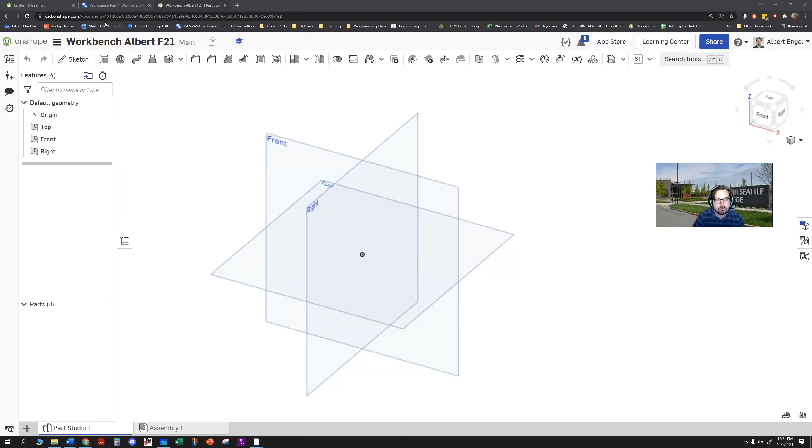All right, so let's do a little work on our workbench. So our workbench model is to build a workbench out of some 1-inch tubing and some thin plate. And we have some default dimensions on different sizes. I'm going to start with a very basic workbench design that we can then model.

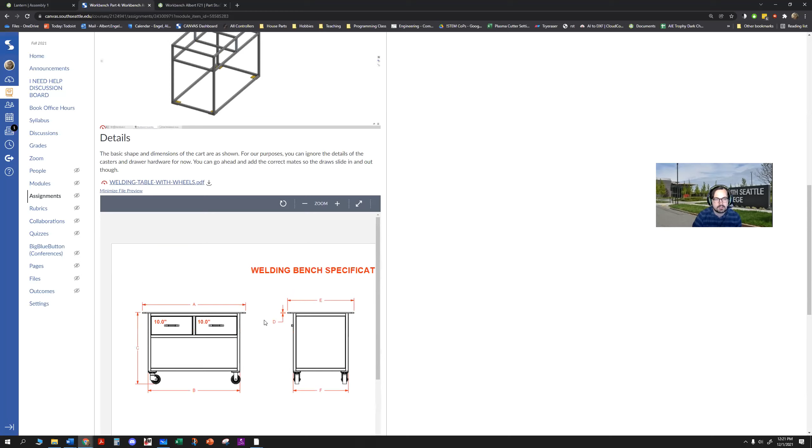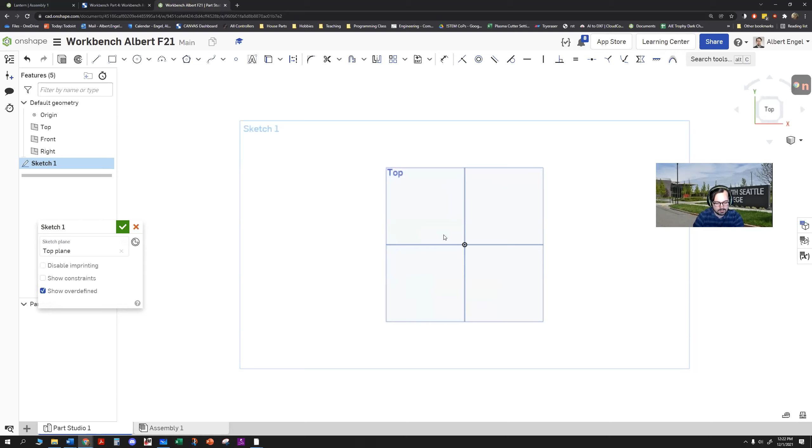Whenever I create something like this, just like our lanterns, I want to start with a proto sketch of the general dimensions of my workbench. So let's start with that. I'm going to create a sketch here in the top plane. And I can use N for normal and P for plane to turn off the planes. Now I've got a nice place to work from. I'm going to create a rectangle here.

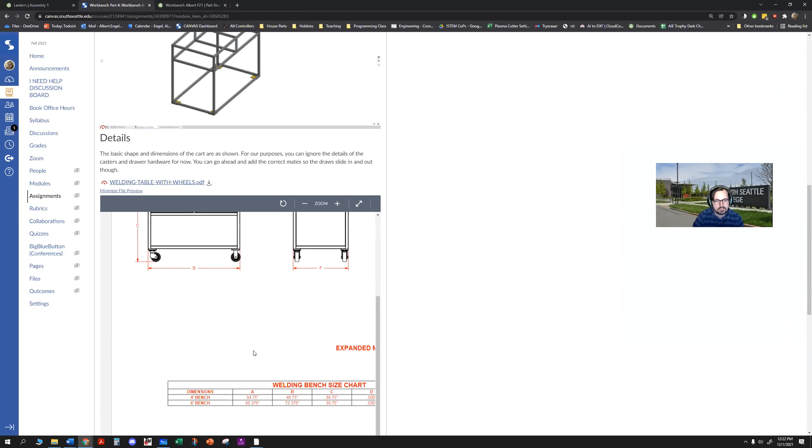Before I do that though, let me check my units. I want to go in and check my workspace units. Yeah, I want to work in inches for this, because if you notice here, all of my dimensions for my drawings here are in inches and feet, so that makes it a little easier if I start with that. And I'm going to start with my rectangle now. I'm going to go back and create that sketch one more time in that top plane. I can turn off P for plane.

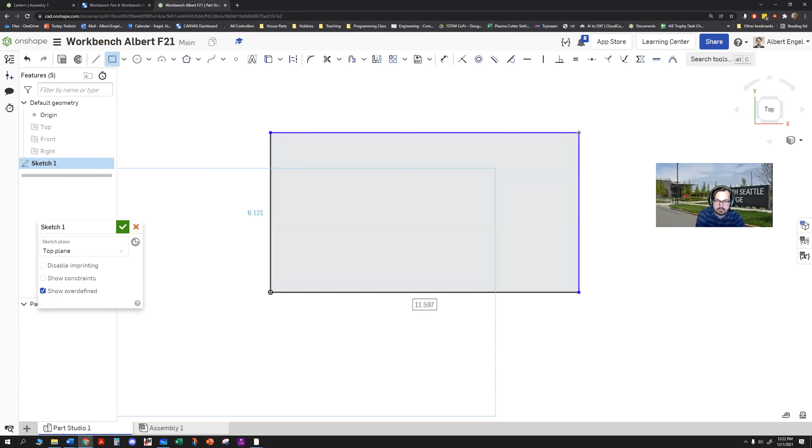I'm going to grab a corner rectangle. I'm going to drag it out. And then the nice thing about this is if I've got this, I'm going to put in some dimensions. I'm going to type in 48 and let's do 30. That tends to be a good workbench width. We can always go back and change these dimensions to match later. I'm going to hit escape to get out of the dimension tool. I'm going to drag these a little bit out of the way of the rectangle tool. And then I'm happy with that sketch.

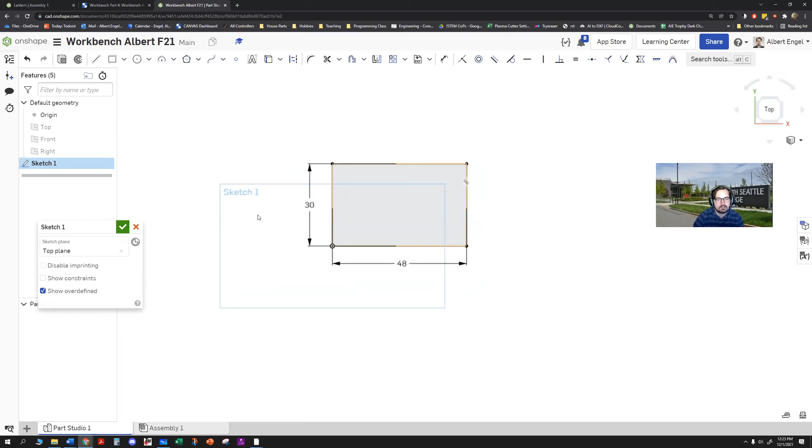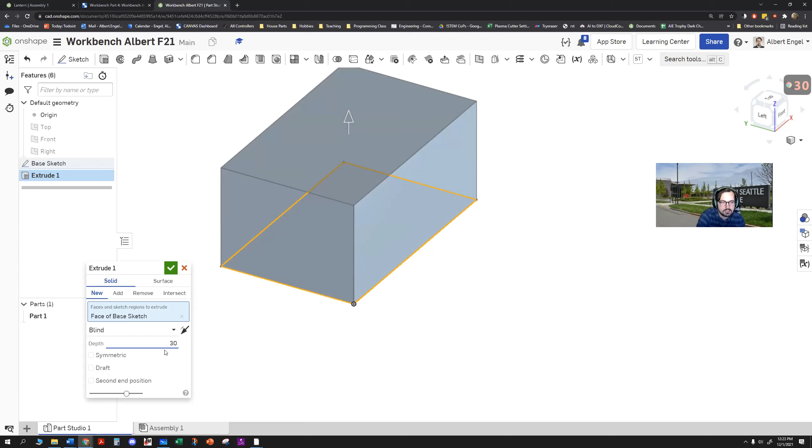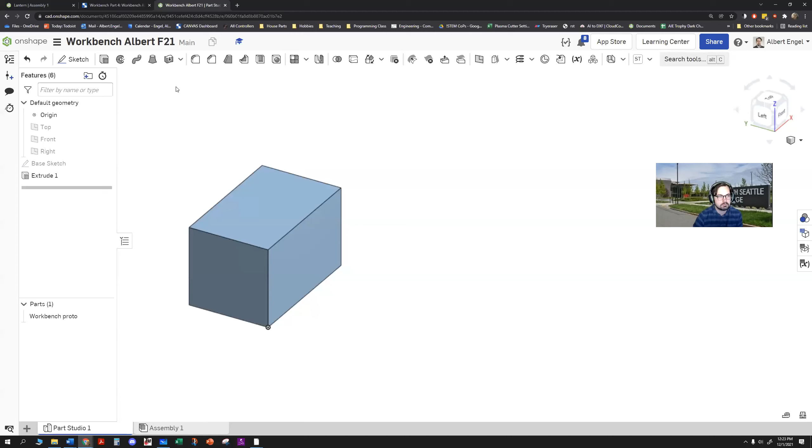I'm going to rename this. This will be our base sketch, because this will be the bottom of our bench, and we'll extrude it upwards. So I'll go to a corner sketch, extrude this up to create our prototype. Boom. Let's do a workbench height of about 30. And I'll rename this part. Let's call this workbench proto shape. Remember that a proto shape is just kind of a stand-in for the outside dimensions of our shape here. And I'll do one more sketch to create the top.

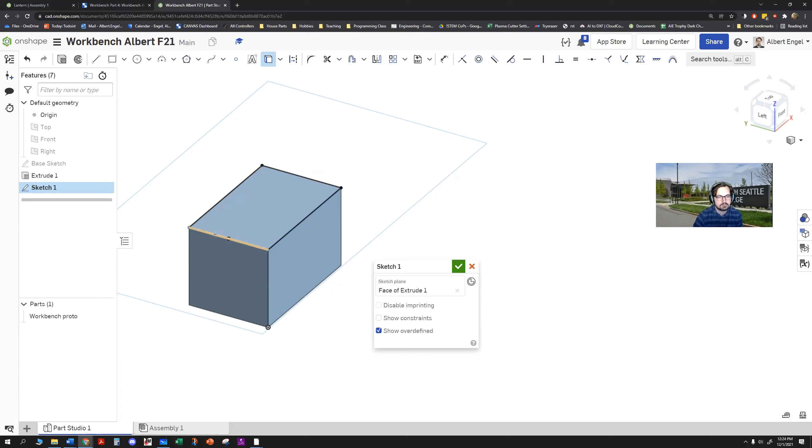Let's grab the top here. For that top, I'm going to use the top of our proto bench, and I'm going to go up from there. Let's do a use command to add these edges to our sketch. Now I can turn off the workbench proto. Here's the bit that I created. I want to offset this a little bit, or even just use a center point rectangle.

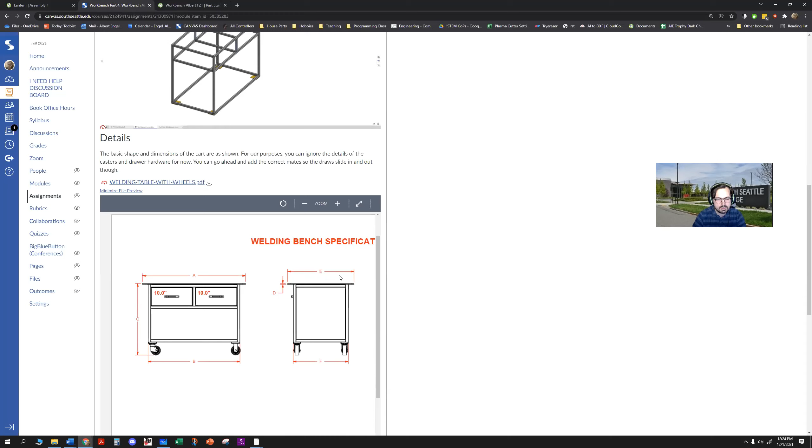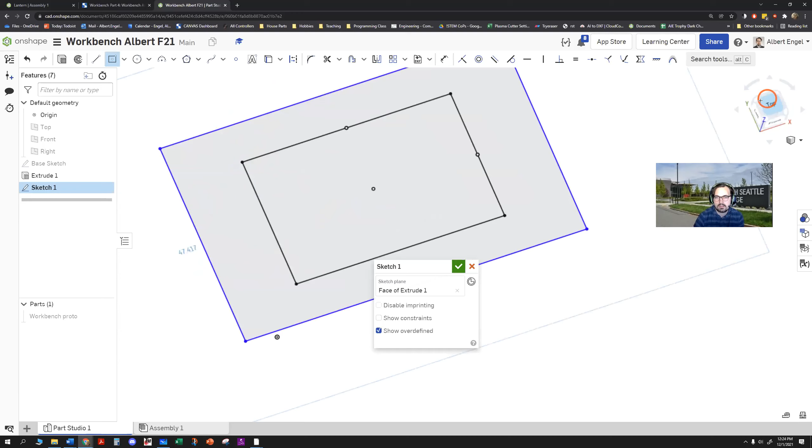Let's do a center point rectangle here, because I think the dimensions for this are defined by the drawings. Yeah, so A and E are defined by the drawings. So I want to use a center point rectangle from the middle of this. So I'll grab center point rectangle. I'll kind of mouse over the middle here, mouse over the middle here. And if I kind of go in the middle here, boom, there's the middle of my shape. I can drag out.

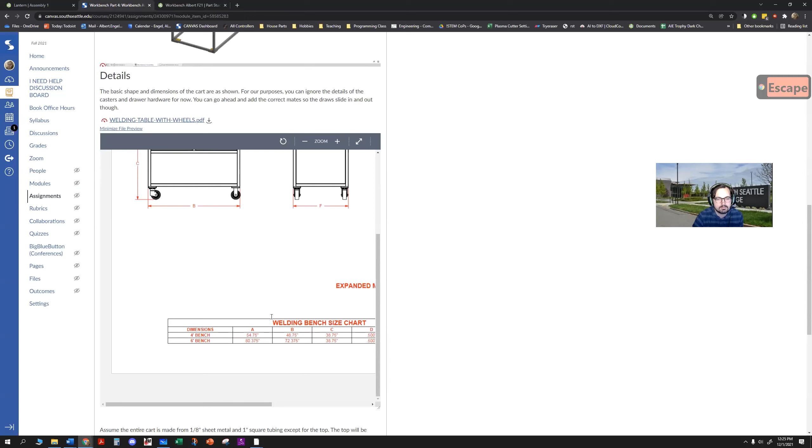And let's go to the top here and decide what our general size is. So for this one, maybe let's try 60. That looks pretty good. And then let's do 48. Now I can always go back in later and update these dimensions to match what is in here. But for now, I just want to get some shapes drawn, and then I can go back and edit dimensions and get it precise later.

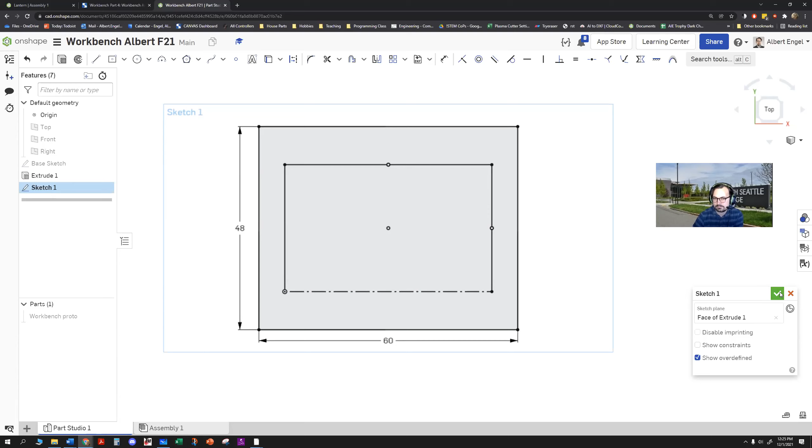This one, I'm going to make a construction line to make this extrusion a little easier. Now when I select, I still have to select both. Boo. Sometimes it has a little trouble with that use command. It'll keep that as a hard edge, but we can make this work. All right, I'm going to call this top surface sketch. Let's just call it top sketch. And I'll use this to extrude the top of my workbench.

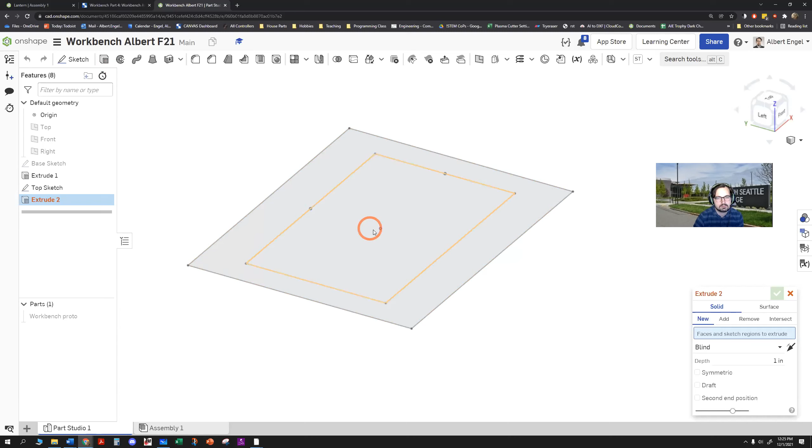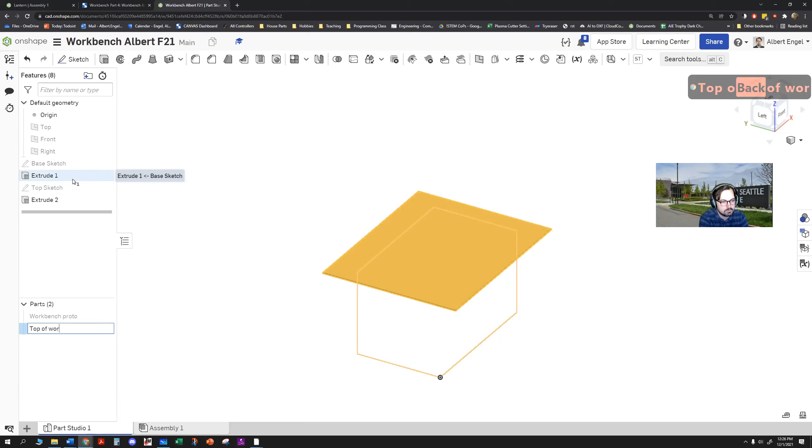Go to a corner view here, and let's extrude this. I'm going to grab these areas here. I'm going to extrude it up. If I made this out of 1-inch material, that would be a very, very heavy bench. So let's do 1/4 inch. And there's the top of my workbench. Top of workbench. So at this point, you should have a proto bottom. Let me turn that back on, and a top.

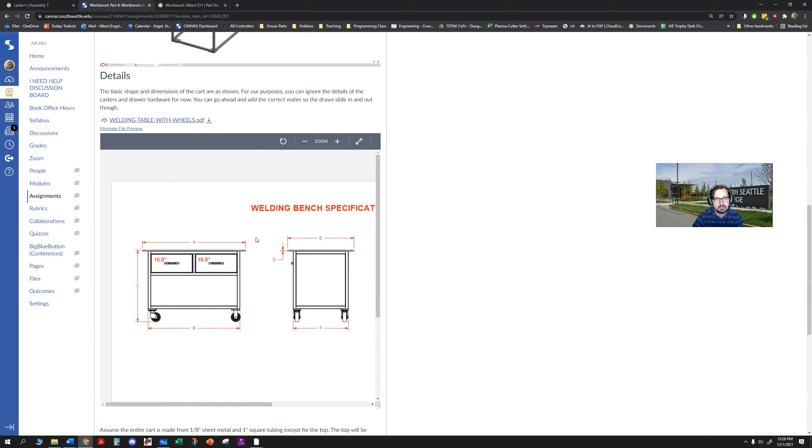And now we can start adding. We want to add in our supports. All of the structure of this is going to be made out of 1-inch tubing. Now the 1-inch tubing is a file that came from McMaster-Carr. So you can see here's the model here.

I've actually put the file in here because I had a lot of students ask about this, because if you go in here, there's actually several links that you can choose from. But the link doesn't matter. We just want the cross section of that tube. So I'm gonna hit download to download this STEP file, put it in my downloads folder.

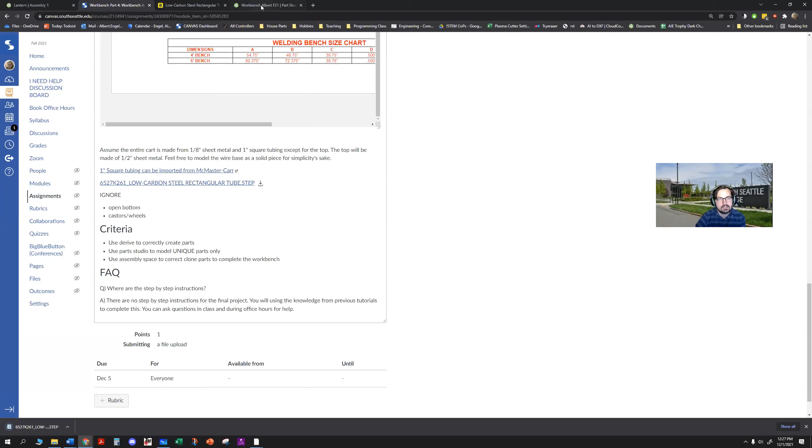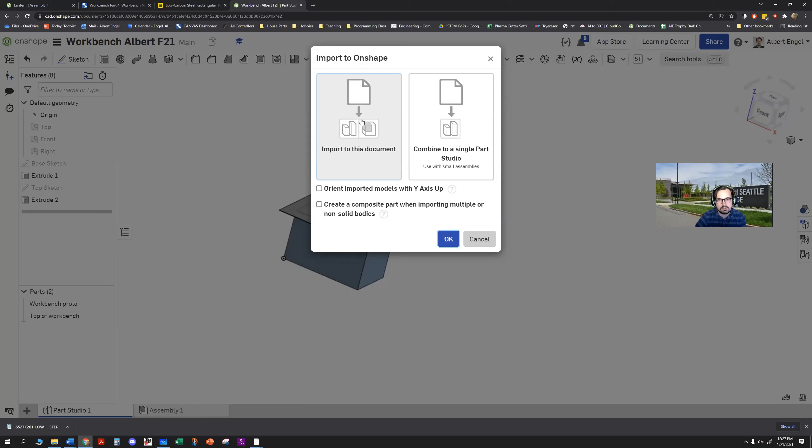And then in that workbench model, I'm gonna add this object. I'm gonna insert a new element. I'm gonna import, and I'm gonna go find that file and add it to this document. I want to import it to the document. In this case, it doesn't really matter which one you pick because there's only one tube.

I'm going to rename this because I'm very creative, just tube, because I don't need all of these part numbers. I could save them for later if I was going to order this from McMaster-Carr, but I'm just going to say 1-inch tube here. Rename and hit 1-inch tube.

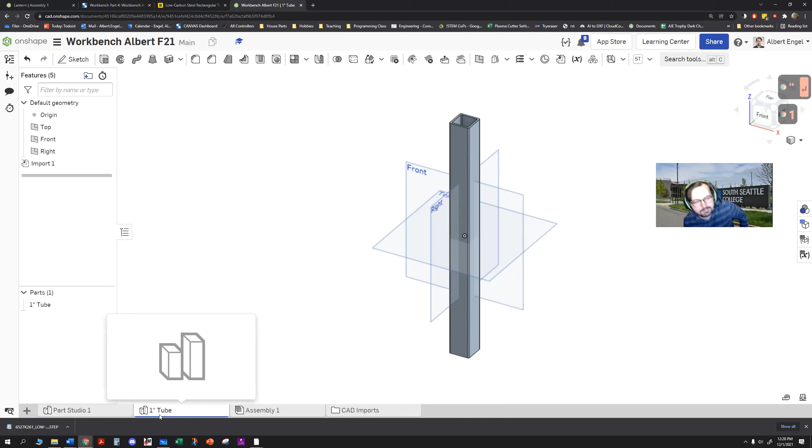All right, so this 1-inch tube is going to be kind of our master tube. We're going to use this to create all of the other tubes in our part studio. Now, I like to only create unique parts here. So I'm going to think about how I want to build this bench. Let's take a look at how this bench is constructed.

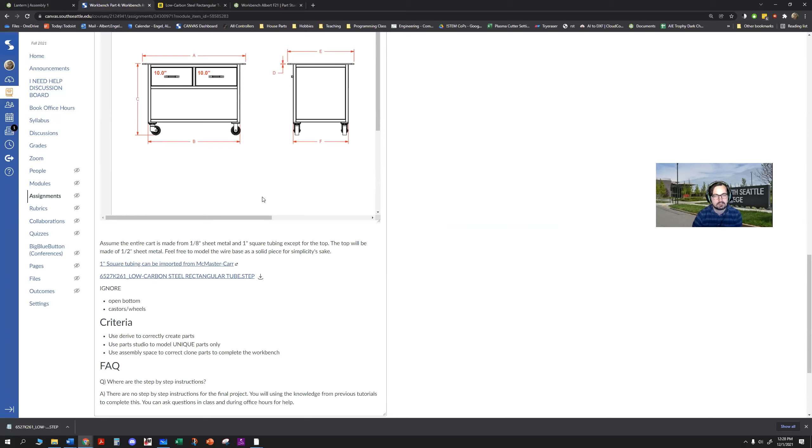If you look at the sides, you'll notice that the verticals go fully from the bottom all the way to the top. So let's do a vertical first. Let's add one of those verticals. So in here, I'm gonna create a copy of this that I'm gonna then manipulate. So one way, if you just want to steal geometry from another piece and create a brand new part that you're gonna then edit, is to use the derive function.

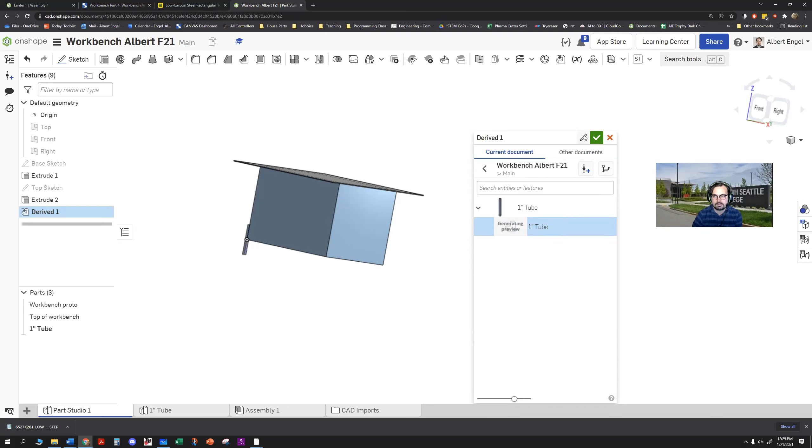So I'm gonna hit derive now. It's gonna ask me, where do I want to steal geometry from? I'm going to steal that 1-inch tube. And I'm going to hit the green checkbox when I'm happy with that. And this part is a brand new part. It exists on its own.

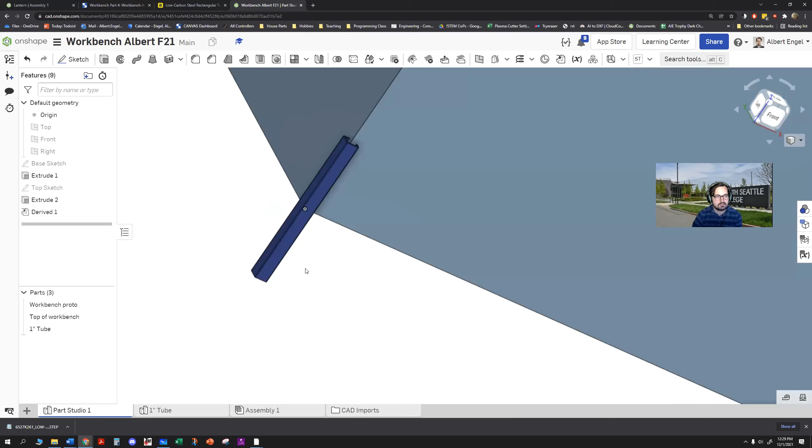It doesn't have anything in common with, it just has the geometry from the other piece. It exists on its own, and it comes in with the same name, but it is a very different part. So in this case, I'm going to take this and I'm going to use this now to help me build my bench.

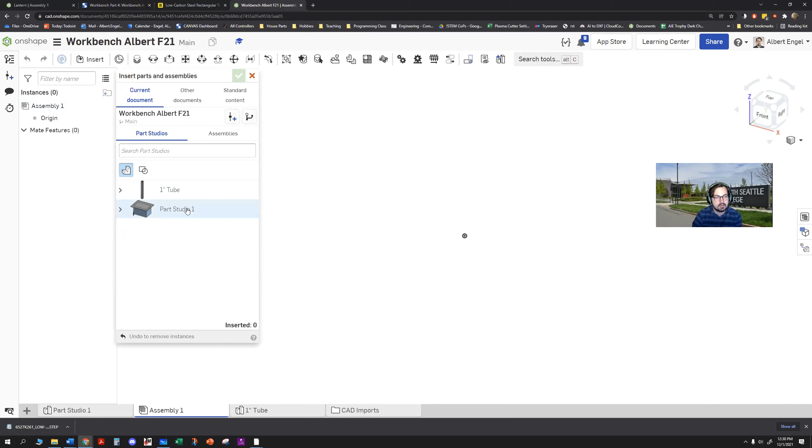And at this point, we're going to be kind of bouncing back and forth between the assembly tab and the part studio tab. So I'm going to actually leave this as part studio and assembly because I think the names are helpful. So let's come into our assembly and add those parts that we've added to our part studio. So I'm going to hit insert. I'm going to grab the part studio. I'm going to grab the workbench proto. I'm going to grab the top of the workbench, and I'm going to grab that 1-inch tube.

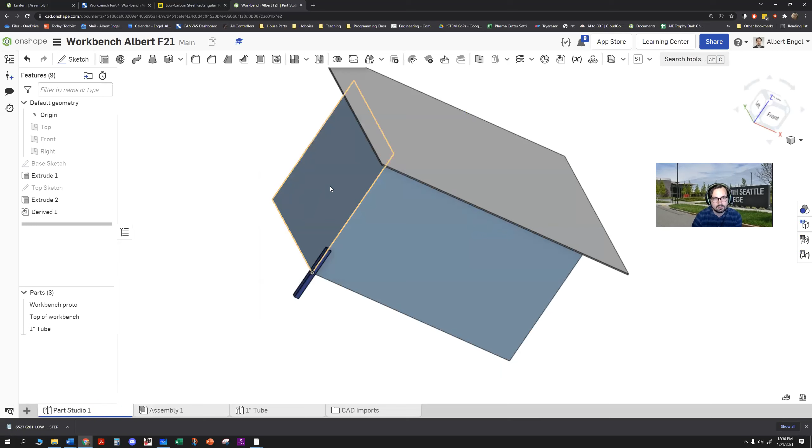At this point, I'm going to start putting this in the right location. So I know this is the outside edge of my bench. The piece that I want to do, oh, I forgot one detail. There's one bit that I'm missing here. I want to get this face. This face is going to help me. So I'm going to create this edge here.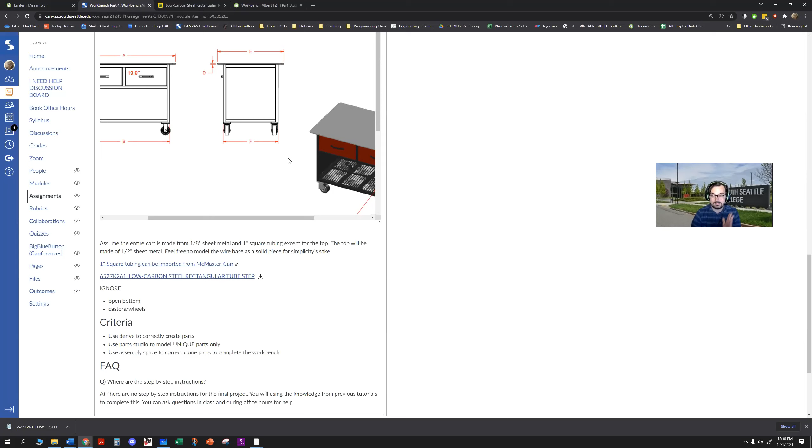Now I said this was my outside edge. So when I extrude this way, I'm going to grab this edge here, and I'm basically going to be creating this piece of sheet metal here on the left edge. Now remember, this is my proto, so I want to go in, because this is the outside dimension. So I'm going to go in for this. So it's going to default to go out. I want to flip it around and go in, and 1/4 inch is really thick for this.

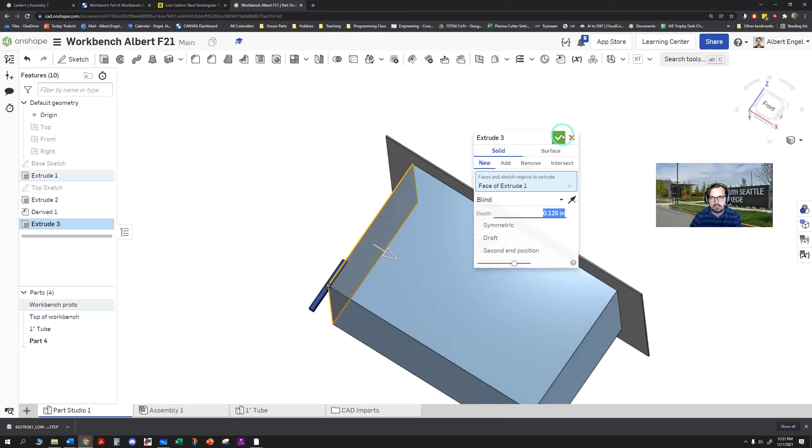So I'm just going to do 1/8 of an inch. I think that's a good size here, and I'm going to say accept. I'm going to call this part 4 that's created. I'm going to rename that. This is a side sheet metal.

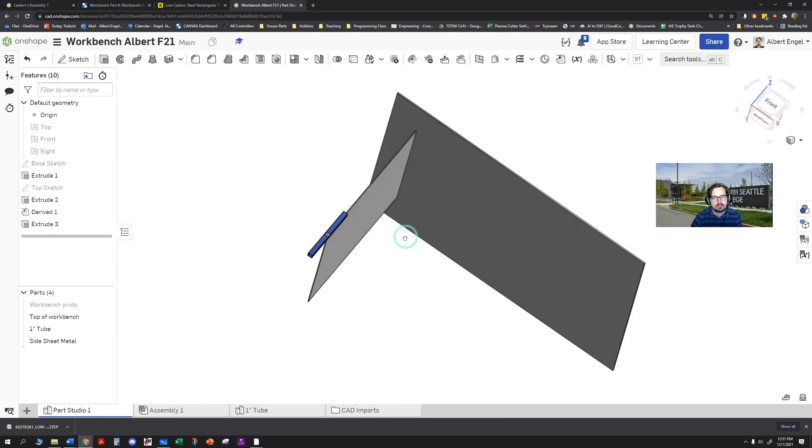Leave that as so. So now we can turn off the Workbench Proto, and you'll see the side sheet metal is there. We're going to use that to help us locate where this 1-inch tube is going to go in my assembly. So adding that to our piece, we're going to come in here and add that side sheet metal. Hit OK. So I can turn off the Workbench Proto, and you can see there's my sheet metal.

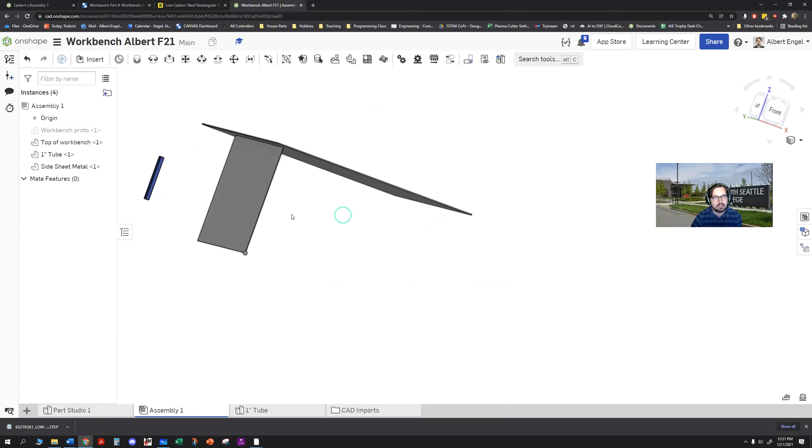At this point, I like to group some things so they don't move around relative to each other. So I'm going to grab the Workbench Proto. I'm going to fix this in space. If I right click on here, for some reason it's stuck in move mode. I can also right click over here, and I'm just going to hit fix. So now this is fixed in space. I can't drag it around.

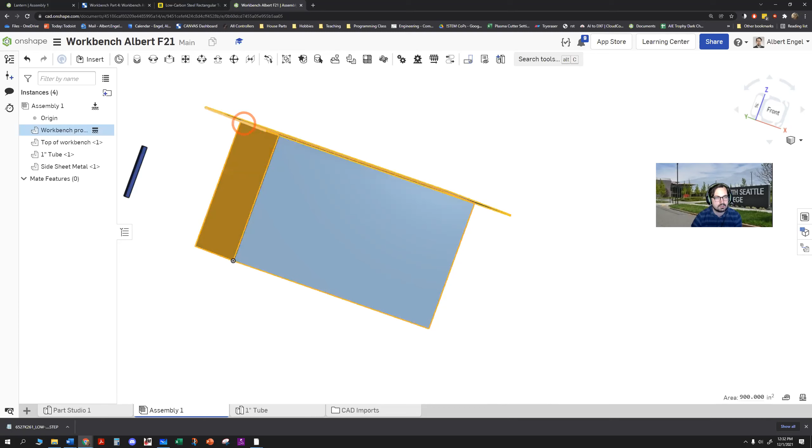I'm also going to lock in these three things: the Workbench Proto, the top of the workbench, and the sheet metal. And I'm going to group these together, so these are all locked into each other. Notice all of these parts are locked in. I'm going to turn off the Proto. I no longer need it. I'm going to use this now to create my tube.

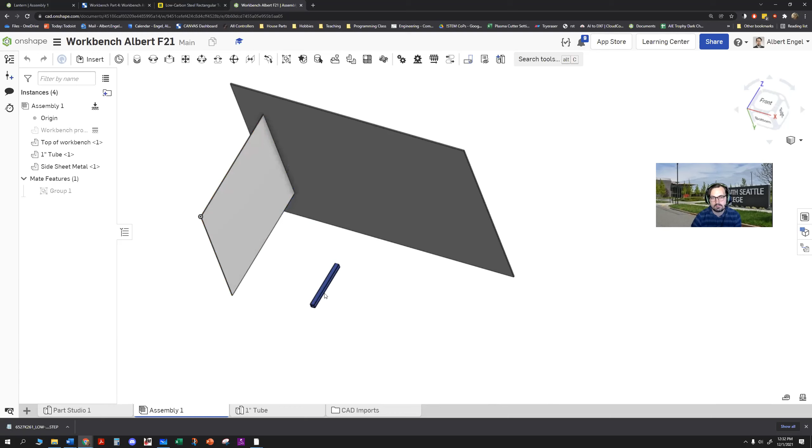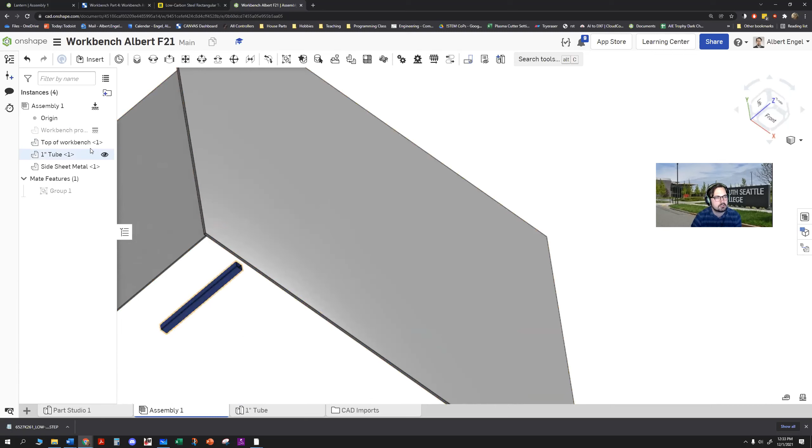Now my tube is going to go on the inside edge, right? I want it to go about here. My first vertical is going to go about there, and that's where I'm going to lock it in. So let's do a fastened mate to get this into position. So going over here, I got that tube, the top of my tube. I'm going to turn off the top of my workbench visually so I can get this locked in a little bit easier. I'm going to use a fasten mate.

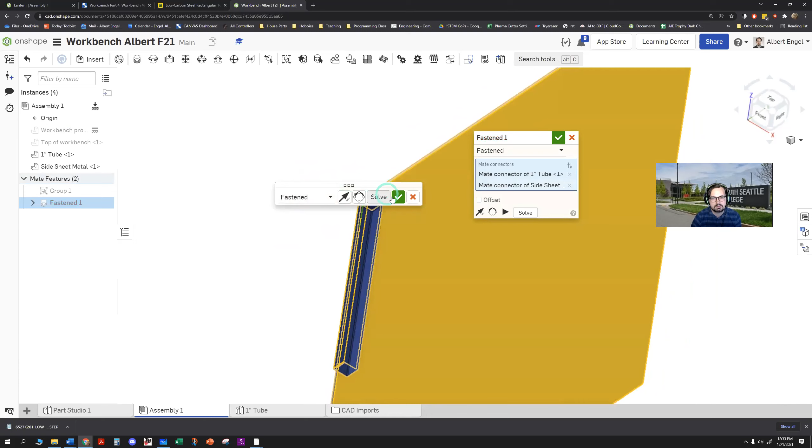I'm going to grab this top edge here, and I'm going to go to this top right corner here. And this will give me a good idea of where this is going to go. Now, you notice there's a bit of an issue. That's not exactly where I want it to go. I actually need a little bit of an offset. You can see I'm missing something here. I need a bit of an offset to get this in the right location.

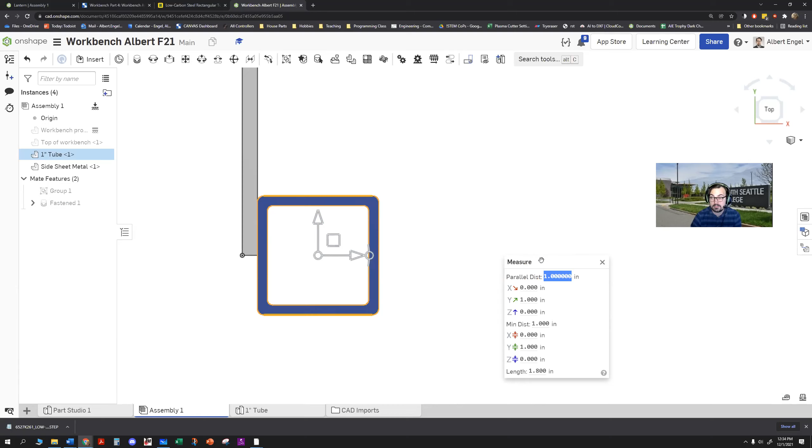At this point, it might make sense to do a little measuring. I can measure my tube from outside to outside. And the nice thing about 1-inch tube is the nominal dimension is actually 1. So you can get an idea of where this offset's going to go. So let's go to fasten one more time. You'll notice the axis here is red. So when we do this offset, we're going to offset this by 1/2 inch. And there we go. Now our tube is aligned. It's in the right location.

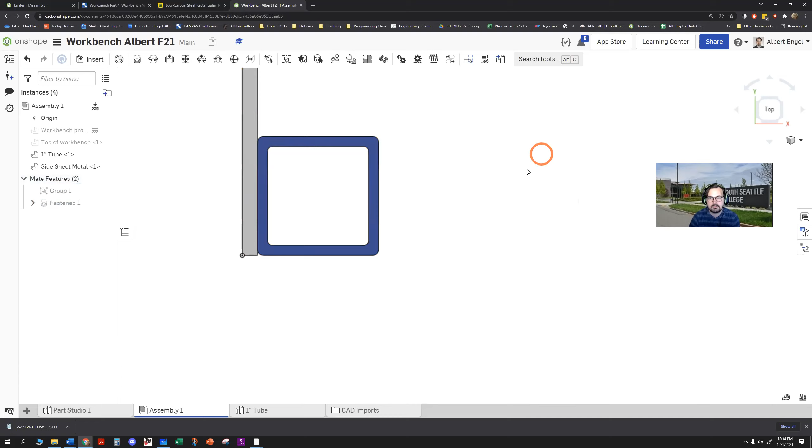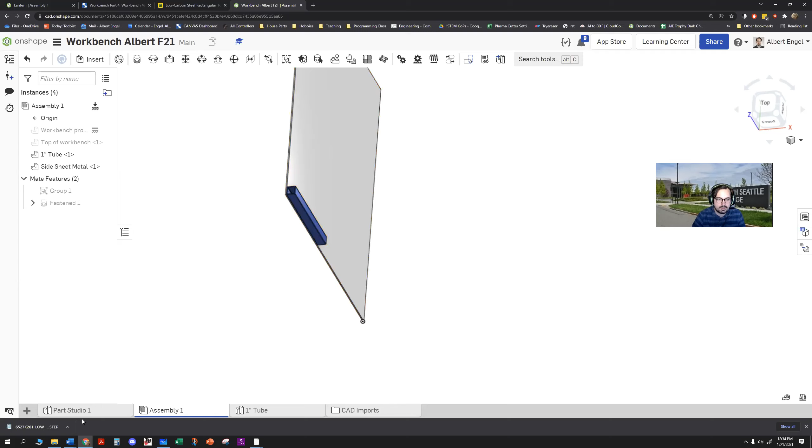But at this point, you're going, Albert, you're missing something really important here. What am I missing? Look at that. It's too short. How do I edit this? Well, I really want to edit it based on this assembly, not just editing it in its own bit here, or editing without context. I want it to be based on this assembly. So I'm going to use edit in context. I'm going to grab this piece, right click on it, and hit edit in context.

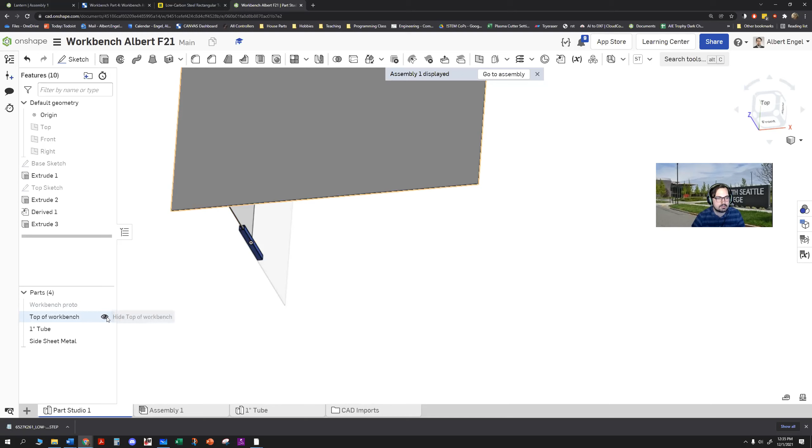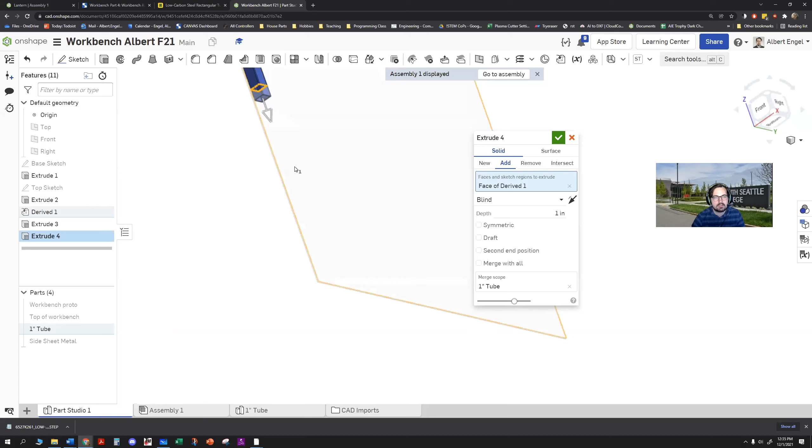And in that assembly, you'll see here's the assembly 1. I'm going to use that to change the length. And I'm going to do that by extruding this edge here. So I'm just going to extrude. I'm going to grab this edge. And because I want it to go all the way to the end, I could drag it down and try to get this all lined up and eyeball it.

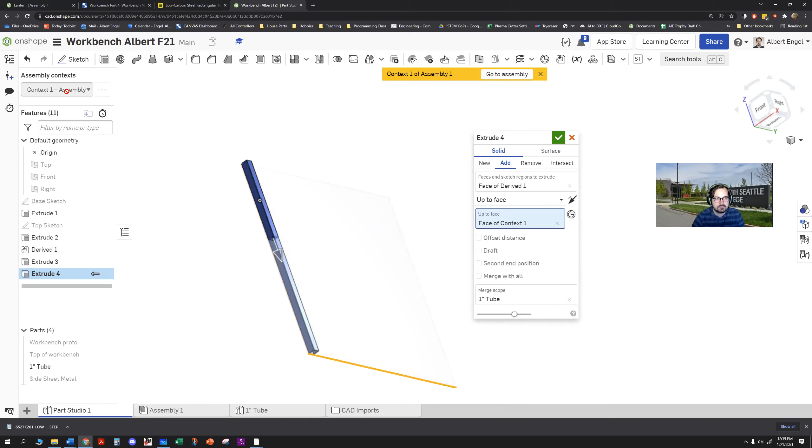But there's another way to do this. I'm actually just going to go all the way to this edge here. So instead of doing a blind type, I'm going to go up to face and grab this face here. Right there. That is our vertical. And I'm going to hit the green checkbox to accept. In this context, I'm going to rename this as vertical leg. I'm also going to rename this 1-inch tube because now it's serving as a vertical leg.

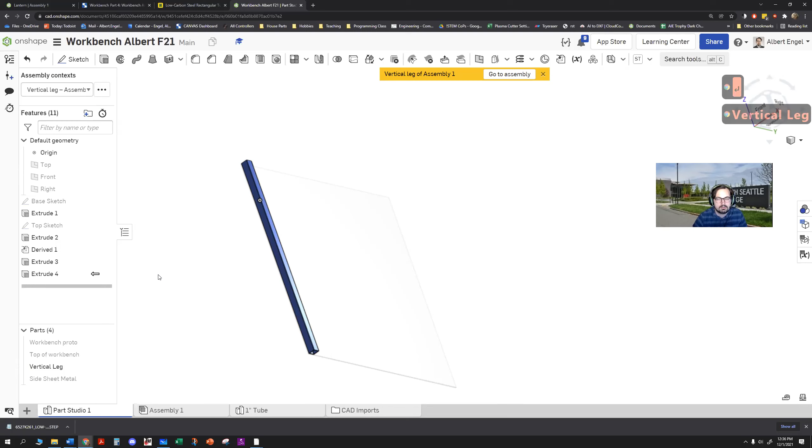That's our shape. Once I'm happy with that, I'm going to hit go back to my assembly, and there's my part. I've got my vertical leg and it's been edited in context. I'm going to stop right there.